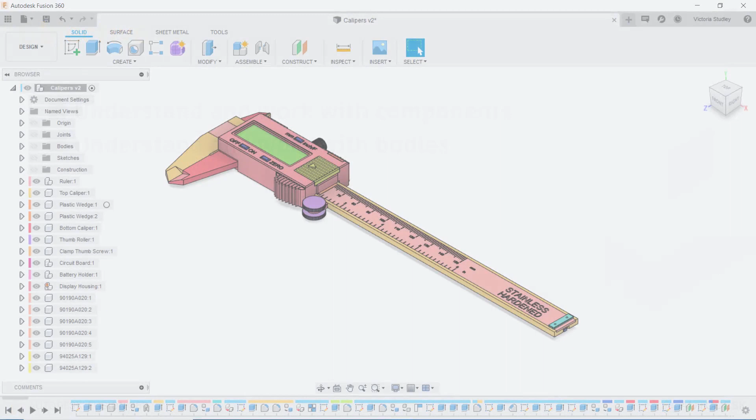In this video, you'll learn how to work with components and bodies in Fusion 360. You can create all of the components of your design in context, and define the mechanical relationships and motion between them, all within a single environment.

Let's look at the browser to understand how you can use components to organize your design. A component is a container for design elements like sketches, construction geometry, bodies, origins, and even other components. The top node in the browser is a top-level component that exists by default in every design. Document settings, named views, and joints are always located in this top-level component.

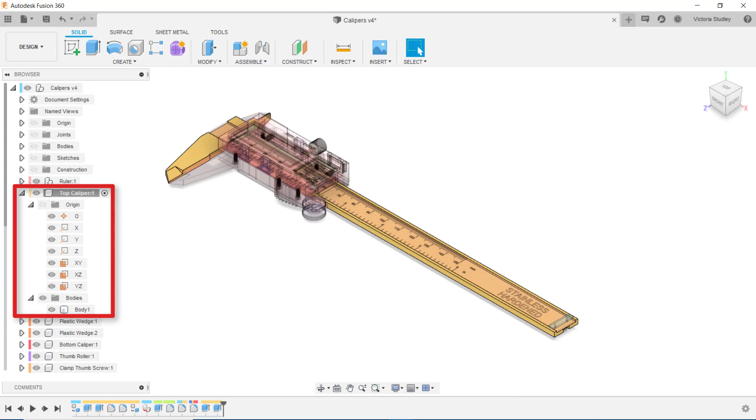You can create as many components within a design as you need. Each component is capable of motion, has its own unique origin and coordinate system, and also has its own timeline. Each component also has a name, number, and description that will display in a parts list.

You'll need to use components to organize your design if you plan to use any of the manufacturing or documentation tools in the manufacture and drawing workspaces. It's important to organize your design so that you and anyone you're collaborating with can quickly understand the relationships between components. As a best practice, it's a good idea to first create a new component within your design, activate it, and then begin defining its geometry.

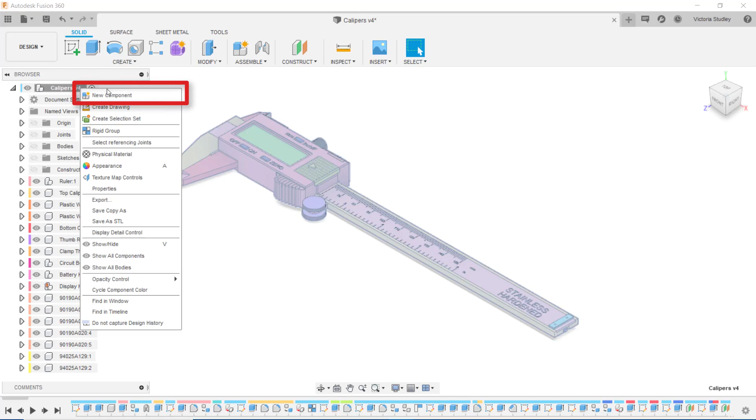Right-click the top-level component and select New Component. You can also access this command on the toolbar from the Create or Assemble panels. Name the new component, and now you're ready to start sketching and creating geometry for that new component.

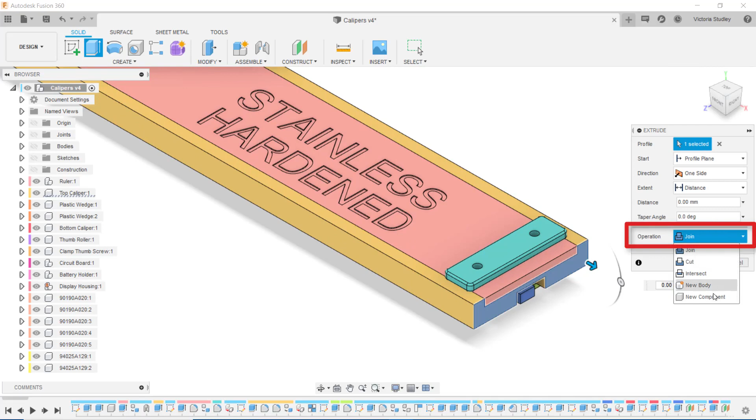You can also create a new component while you're in a command like Extrude. Activate the command, select the profile you want to extrude, change the operation to New Component, then click OK. Note the new component is created in the browser, and don't forget to change the name to something meaningful.

This keeps your design well organized and makes the timeline easier to understand and interact with in complex designs by keeping component-specific changes nested within the component's timeline.

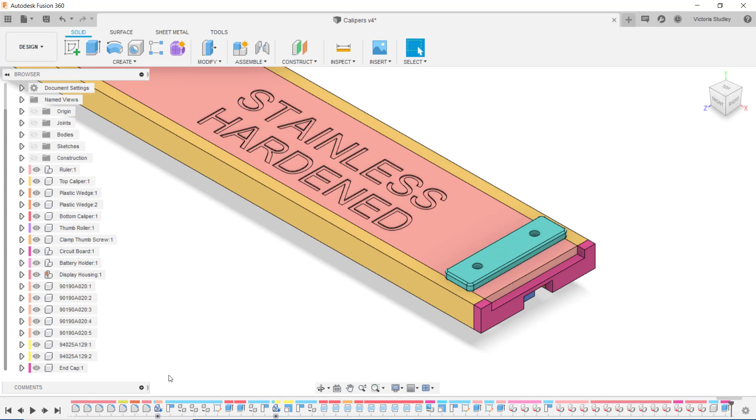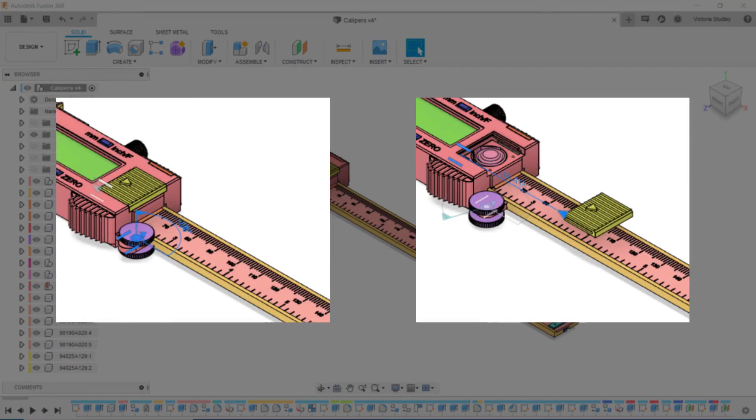In the browser, you can drag one component into another. Notice the assembly icon indicates that this component contains additional components. You can activate any individual child component nested under the parent component, or activate the parent component. You can create joints to define mechanical relationships and motion between components.

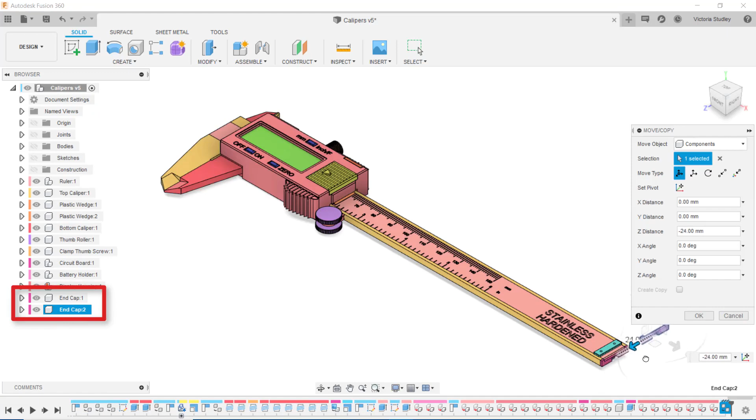You can also reuse components within a design. Right-click a component in the browser, select Copy, right-click the parent component where you want the copy to appear, then select Paste. This creates an identical copy of the original component. Note that the components share the same name, except for the :1 and :2 at the end of the name.

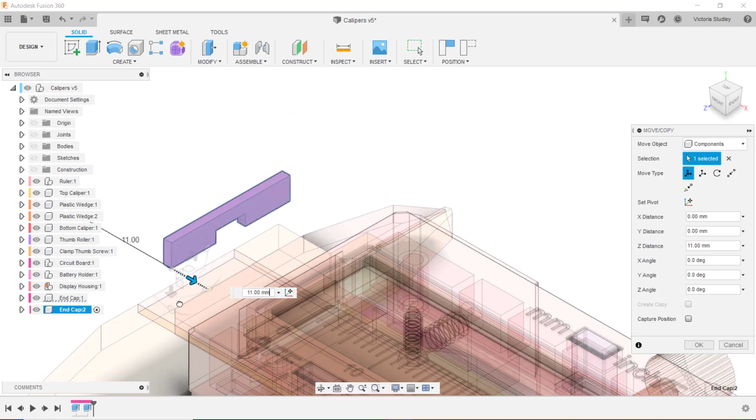When you make a change to one copy, the other updates to reflect that change. However, you can position each instance of the component independently. Note that if you choose Paste New instead of Paste, an identical copy is created, but it is not linked to the original. When you make a change to one copy, the other does not update to reflect the change.

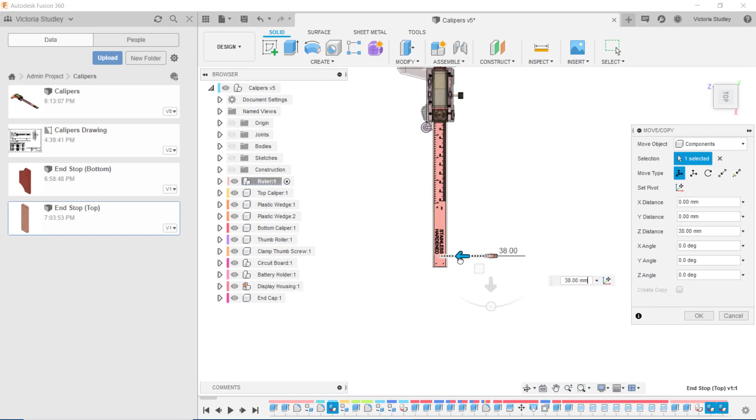You might also have an external design that you want to reference as a component in your current design. To do this, in the Data panel, navigate to the design you want to reference. Right-click the design and select Insert into Current Design. Use the manipulator, or adjust the settings in the Move Copy dialog to position the component, then click OK.

Notice that the inserted design displays as a component in the browser. The link icon indicates that it is an external reference, or XREF for short. The inserted design is now listed in the Uses section for the current design, and the current design is now listed in the Used In section for the inserted design.

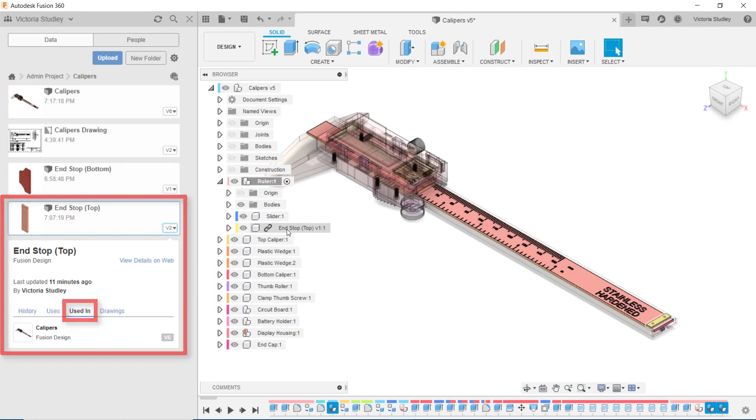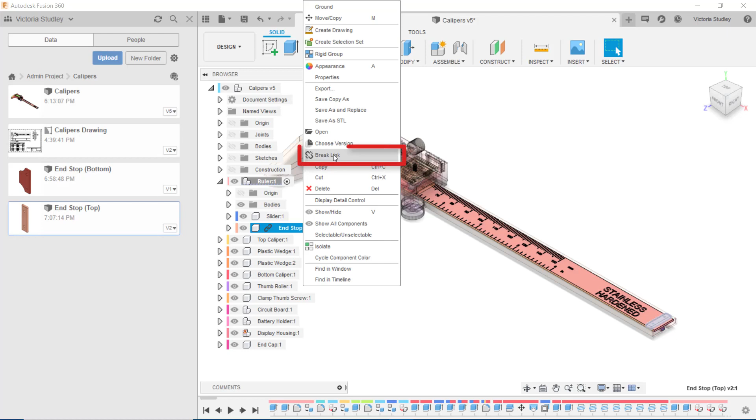If you or a collaborator open the inserted design, make a change, and save it, the current design will display a warning symbol over the component in the browser and in the application bar, indicating that the XREF is out of date. Right-click the component and select Get Updates, or click the icon in the application bar, and you'll see the latest changes. If you right-click and select Break Link, the component is inserted directly into the design and the link between the two designs is severed.

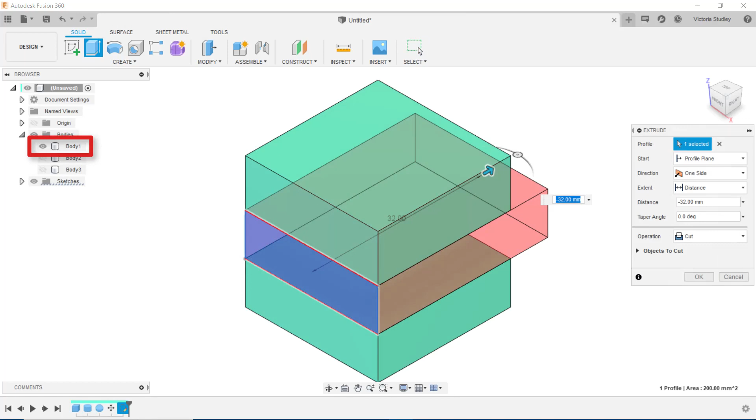Now let's introduce bodies. A body is a single container for a contiguous 3D shape. This could be a simple primitive like a box, cylinder, or sphere, or a more complex 3D shape. If you split a single body, it becomes two bodies, because the original 3D shape is no longer contiguous.

Each body is contained within a component, whether it's located in the top-level component or one that you created intentionally. Each component can contain multiple bodies, but note that you cannot create joints or motion between them.

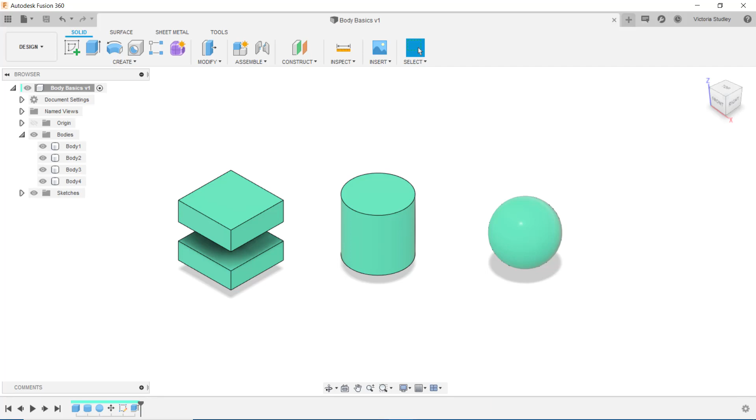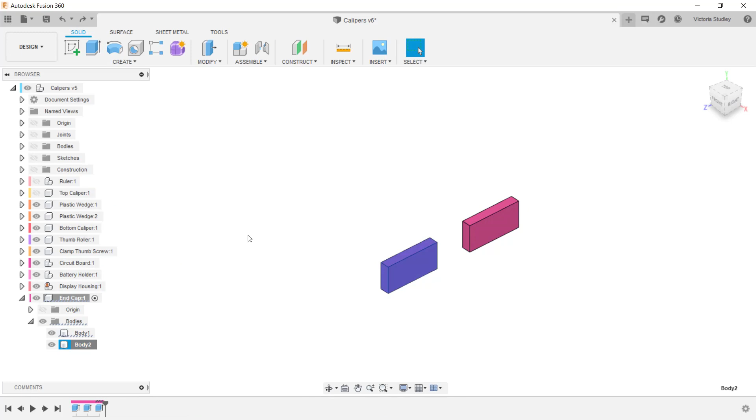There are a few things that you should consider when creating bodies. Before you modify a body, make sure you activate its component first. Consider hiding other components when you modify a body to avoid creating unnecessary relationships between bodies across different components. If you copy and paste a body, each copy remains independent. Changes you make to one body will not affect the other.

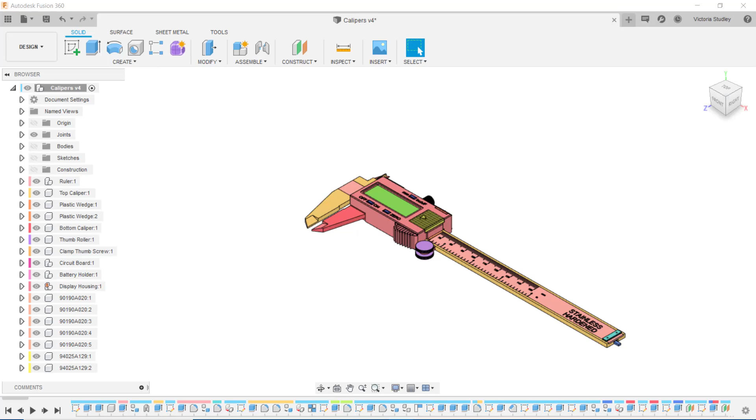Bodies do not display in drawings or in a bill of materials. And if your design requires motion between components, it's best to create components first, then create bodies within their respective components from the start.

Now, if you've already created a body in the top-level component, you can create a new component later by right-clicking the body and selecting Create Components from Bodies. But the tools and operations you used to create the original body remain in the top-level component and are still associated with its timeline. This can make the timeline difficult to understand and interact with as you evolve your design.

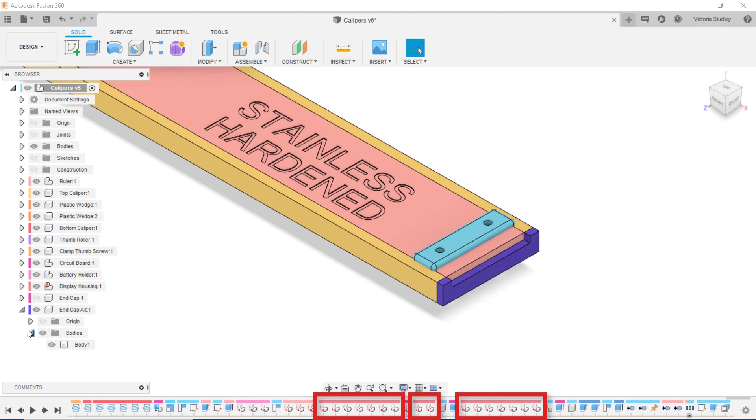If you activate the component now, its timeline only contains this body-to-component operation. The history doesn't come along with it. This is why it's considered best practice to create a new component first, name it, activate it, and then start designing.

Now you know how to organize your design using components and bodies in Fusion 360. Thanks for watching.